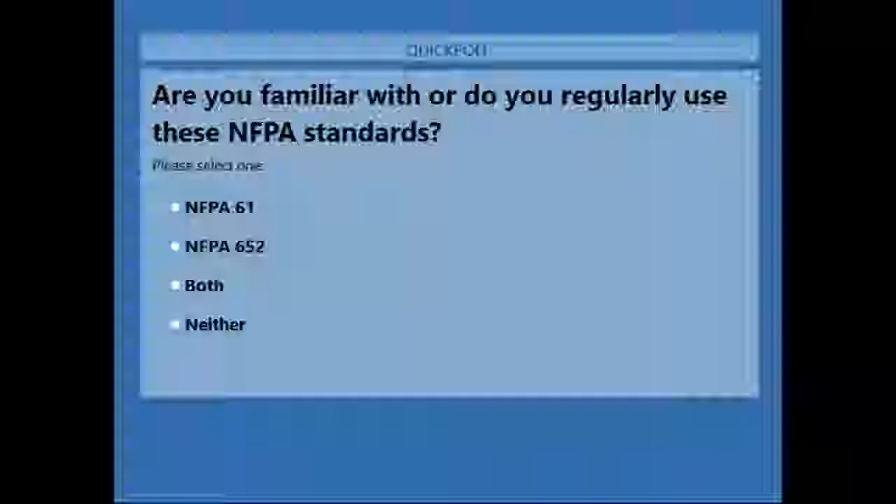Wow, okay. Both or neither is equally split. So that's a good spread. Matt, you can let me know when you'd like me to close the poll. Oh, you can close the poll. It's just like the election. Equally split, both or neither.

So any discussion on 652 really starts with the Imperial Sugar explosion in February 2008. NFPA 652 is a brand new standard. And the Imperial Sugar explosion in February 2008 was kind of a watershed event as far as changing the NFPA standards. And there would not be an NFPA 652, in my opinion, if it wasn't for this explosion. So the Imperial Sugar explosion, 14 killed, 36 injured. It was a major event. I was in Australia at the time, and I heard about it all the way in Australia because it was on the news everywhere.

So I'd like to talk about the Imperial Sugar explosion a little bit at first. So these are two pictures of the aftermath of the explosion and fire. The key takeaways were, number one, poor housekeeping, overloaded dust collectors, equipment maintenance, and poor management of change. These causes are very familiar and common for combustible dusts, so not surprising that these would be factors at all.

Some of the background on what happened: they had a conveyor system below the silos, and they had recently installed a cover on top of one of the conveyors to prevent contamination. The housekeeping was very poor. Unfortunately, once they covered the conveyor, the dust collector system was not picking up the dust. They had an ignition source, and it exploded.

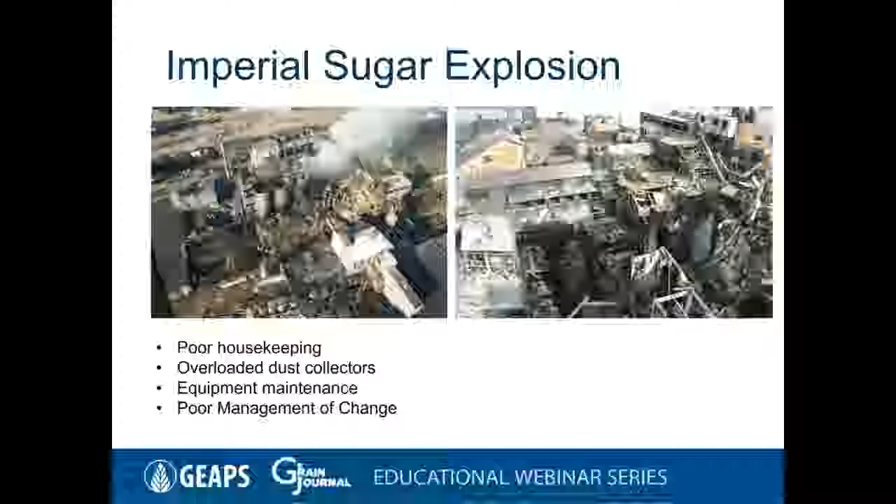So as a result of that, there was a major investigation. The Chemical Safety Board came in and did its investigation, and they had a number of recommendations that they made, both to OSHA and to NFPA, and other government agencies. During their investigation, there was some confusion over which NFPA documents to use.

Technically, sugar falls under NFPA 61, agricultural dust, but some people felt that NFPA 61 wasn't adequate to address what happened at Imperial Sugar. So they were really using some of the others, NFPA 654, which is another one of the dust documents. And there's a total of 5 dust documents, and they weren't exactly clear on which ones to use. So there was a lot of criticism of NFPA because it wasn't clear on what they should use.

There were congressional hearings, there was a call for more regulation. NFPA actually testified before Congress. And then OSHA, at the urging of the Chemical Safety Board, proposed a new combustible dust rule. So there are some existing OSHA regulations, especially for the grain industry. OSHA 1910 Subpart R covers grain handling facilities, but what was recommended was really a more comprehensive rule for the entire food and agricultural industry, and not just food and agricultural, but any industry that handles combustible dust.

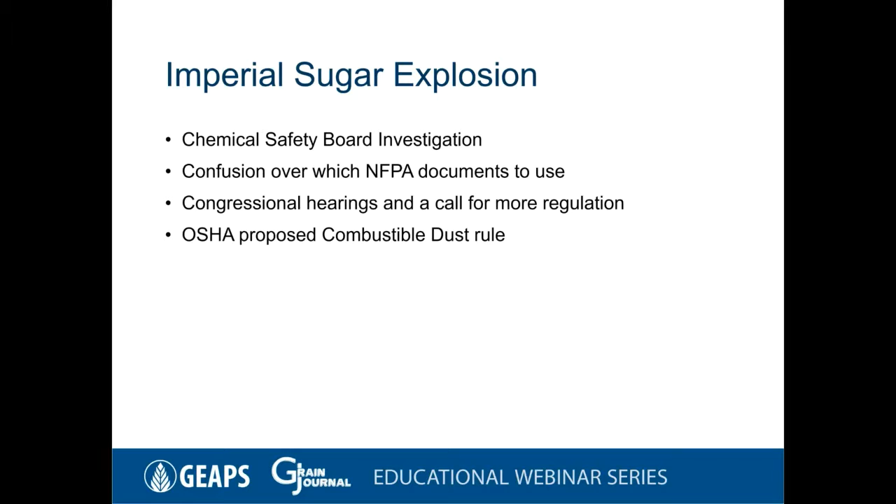So the various NFPA committees had a lot of pushback on combining it into one big standard. So finally, it was agreed to form a new standard called the Fundamentals of Combustible Dust, which was NFPA 652. And so this was developed out of a perceived need to provide basic requirements for handling combustible dust. They started work in 2012 and they finished in 2015.

As you can imagine, there was a lot of discussions, a lot of changes. The standard was delayed 6 months, I believe, because there were some things that couldn't be agreed upon. But finally, 2016 was the first edition of NFPA 652, and it set a requirement to complete a dust hazard analysis within 3 years of the effective date of the standard, and that would have been 2019.

So 652 was a very new document. Not a lot of people were aware of it. Our poll today, 38% of the people were aware of both NFPA 61 and 652, so that's a pretty good number.

But the standard is revised every 3 years, and so the 2019 edition of NFPA 652 set a date of September the 7th, 2020 to complete the dust hazard analysis. So it slipped a little bit from the original date of 2019, but instead of just saying 3 years, it had a hard date of September 7th, 2020. And then it also requires a dust hazard analysis to be reviewed and updated every 5 years.

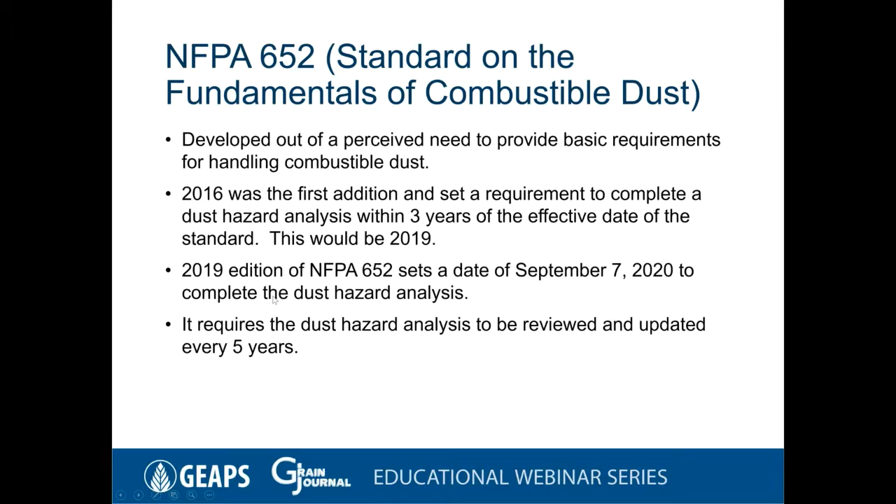So then we moved to NFPA 61, which is the standard for prevention of fires and dust explosions in agricultural and food processing facilities. This NFPA standard, the original version, was adopted in 1923 for grain terminals and flour mills. And the modern version really was adopted in 1995 when several of the agricultural dust documents, including sugar, were combined into one document for the agricultural and food processing industries.

So NFPA 61 is applicable to all facilities that receive, handle, process, dry, blend, use, mill, package, store, or ship agricultural bulk materials, their byproducts, dusts, grains, oil seeds, agricultural seeds, etc. It's sugar, flour, etc. So for GEAPS members, NFPA 61 is the standard that you would fall under.

Also applicable to all facilities designed for manufacturing and handling starch, drying, grinding, conveying, processing, etc. The only thing it really doesn't apply to is what's covered by NFPA 36, which is the oil seed extraction standard for soybean processing, really.

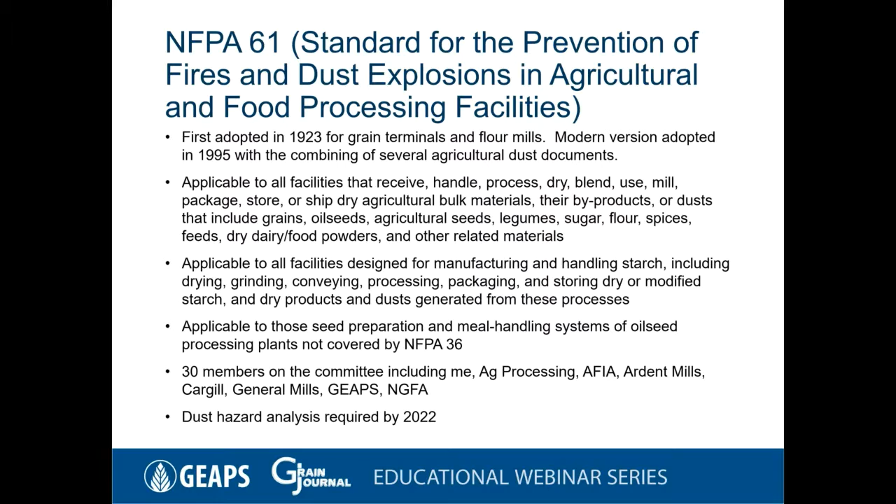So there's 30 members on the committee for NFPA 61. The agricultural industry is represented by Ag Processing, AFIA, Ardent Mills, Cargill, General Mills, GEAPS, and the National Grain and Feed Association. And NFPA 61 says that the dust hazard analysis is required by 2022. So which one do you use? 652 says by 2020, September 7th, and NFPA 61 says by 2022.

So there is a conflict section in NFPA 61, and it's in all the dust hazard standards now, and they pretty much say the same thing. It says where a requirement specified in this industry-specific standard, meaning NFPA 61, differs from a requirement specified in 652, the requirement in this standard, NFPA 61, shall be permitted to be used instead. So basically what this says is that NFPA 61 takes precedence over NFPA 652.

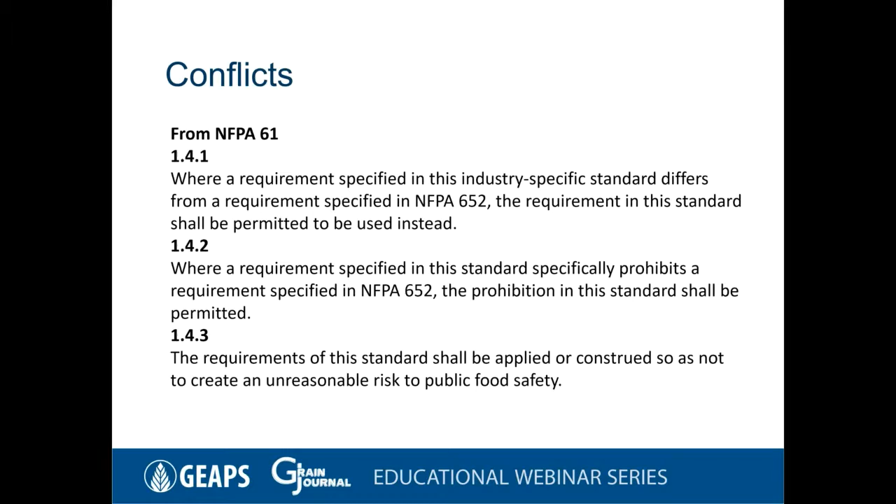Or it says where a requirement specified in the standard specifically prohibits requirements specified in 652, the prohibition in this standard shall be permitted. And then it was also added, the requirements of the standard shall be applied or construed as to not create an unreasonable risk to public food safety. So NFPA 61 is unique from the other combustible dust standards because it does involve food and food safety. So we added that one just to make it clear so that this would not conflict with NFPA 652.

And to handle any conflicts and provide a common framework for the dust documents, a correlating committee was formed in 2012, 2013. So the correlating committee on combustible dusts for NFPA oversees all of the dust documents, including NFPA 61; there's 484 for combustible metals, there's 652 Fundamentals of Combustible Dust. There's 654, which is combustible particulate solids, which originally back in the 50s when it was first started, was really for the chemical industry dealing with plastic dusts and things like that. There's 655 for sulfur fires and explosions, and then there's 664 for woodworking facilities.

There's currently 14 members on the correlating committee. And Cargill is really the only grain industry representative on the committee. Right now, each of these documents is on a 3-year cycle; some of them were originally on 5-year cycles for revision. NFPA 61 was a 5-year cycle document, but because of all the changes with 652 and the changes in 61, all the documents were moved to a 3-year cycle.

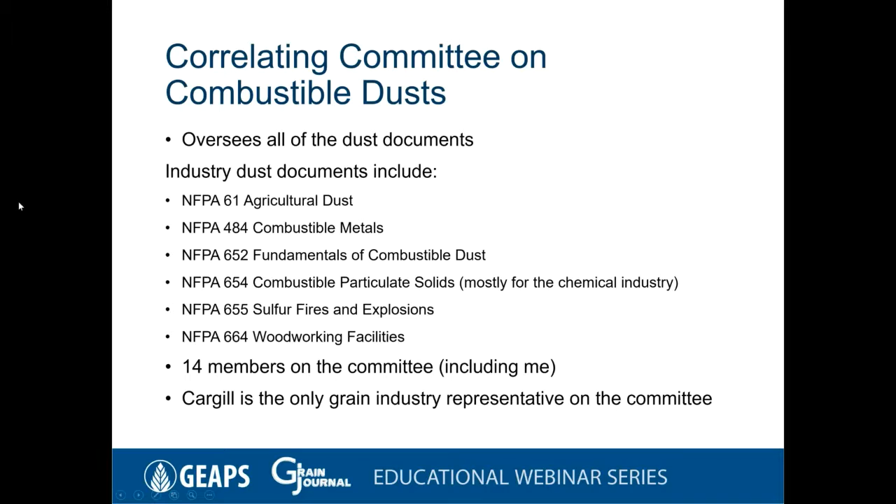So they're currently on 3 years, but now that some of the dust is settled for the changes in 652, we might be changing some of them back to 4 or 5-year cycles. That's kind of in flux right now, and it's up to the committee itself to determine how often they want to meet.

So one of the differences in the dust hazard analysis is that it is retroactive. Normally the requirements in NFPA standards are not retroactive unless it specifically says they are. And in that case, if it's not retroactive, the facility would only need to be upgraded to the current standard if there are major modifications or new processes, et cetera.

But the dust hazard analysis is retroactive, and by retroactive, they mean it's required for new construction or significant modifications that exceed 25% of the replacement cost of the equipment. So it is something that should be done, and should be done by the deadline, if you want to follow NFPA 61 or 652.

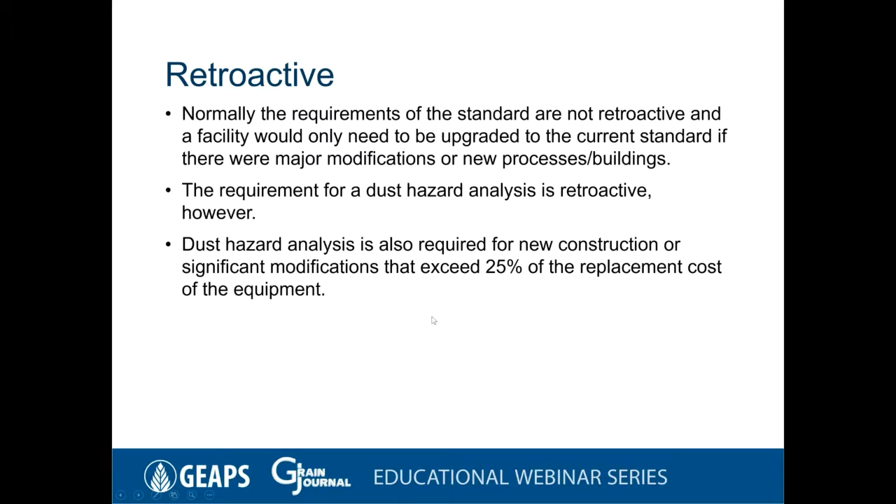So my next polling question is, what documents do you follow to perform a dust hazard analysis at your grain handling facility? And Kendall tells me there was a problem with loading the polling question into her computer system. So if you could just write down your answer, and then I'll give you the answer in 10 seconds.

So the answer to the question really is somewhat of a trick question. NFPA 61 is what I would use as an agricultural or grain handling facility. However, you could use NFPA 652, because in NFPA 61, really, if you comply with anything in NFPA 652, it's going to be acceptable in NFPA 61. So answers A, B, or C would be acceptable for this answer.

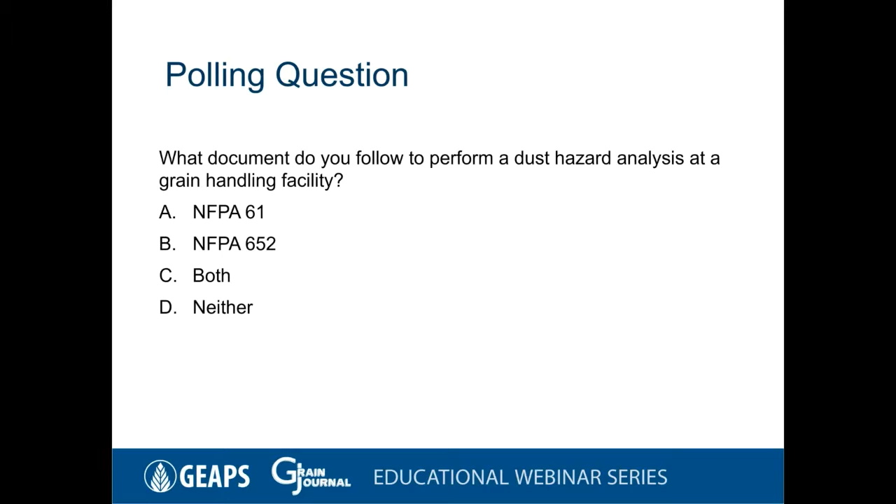So the next question: is there a need for a dust hazard analysis? One of the earliest, largest and most famous dust explosions was in Minneapolis at the Washburn A mill in 1878. At the time, it was the largest flour mill in the world, and it resulted in 18 people dying from the explosion and the ensuing fire. It could have been worse, but it happened on the night shift, so that was fortunate.

And right now it's been turned into a museum. If you ever go to Minneapolis, the Mill City Museum, it's a great museum. I went there last year, and it really shows you how a mill works, what the issues were with the dust explosion, and I'd highly recommend it if you visit Minneapolis.

So moving ahead, 100 years later, Westwego, Louisiana, 1977. That's the picture that's in this slide. Grain elevator explosion, 36 people died. It was a pretty horrific explosion, and it brought around some changes to NFPA requirements. More recently, last year, Cambria, Wisconsin, and Northrup, Minnesota. And then this year, South Sioux City, Nebraska, and Crystal City, Manitoba also had dust explosions, fires.

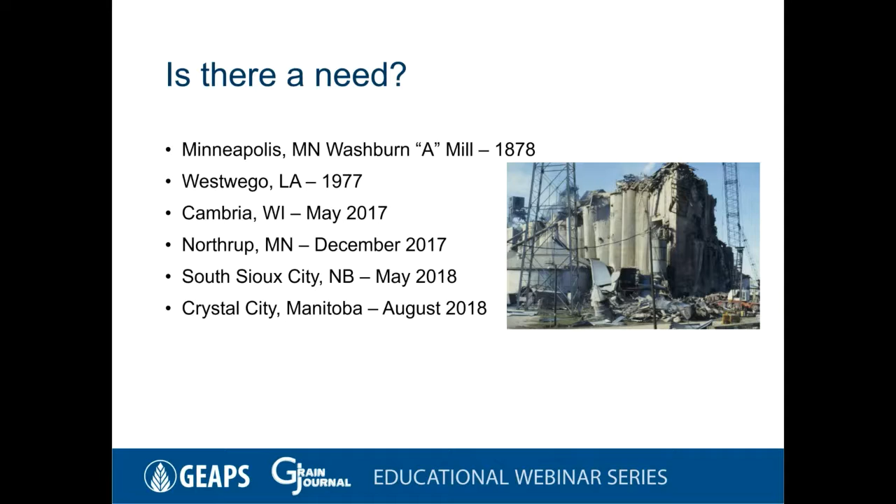So then the question is, okay, who's in charge? Is OSHA in charge of requiring you to do a dust hazard analysis? Right now they're not. If you have an event and OSHA comes in and does an investigation, you'll certainly be fined if you didn't follow NFPA standards or do a dust hazard analysis. But obviously, if there is an event, something went wrong and you're likely to be fined anyway. So is the local fire marshal or building code official in charge? Well, it could be, depending on the laws of your jurisdiction.

NFPA, are they in charge? NFPA is not in charge of anything. They have no authority whatsoever. They're a nonprofit organization that writes the codes, or it depends on the committee to write the codes. So going back to the local fire marshal or building code official, local fire codes and building codes can adopt NFPA standards. So if your local jurisdiction has adopted an NFPA standard like NFPA 61 or NFPA 652, then it could be required by law to complete a dust hazard analysis.

But as far as I know, nobody has adopted NFPA 652 yet. It's too new, and building codes don't change very quickly, and lots of times they're also subject to politics. So I would check your local jurisdiction to determine if it's required by law to do a dust hazard analysis and follow NFPA 61 or NFPA 652.

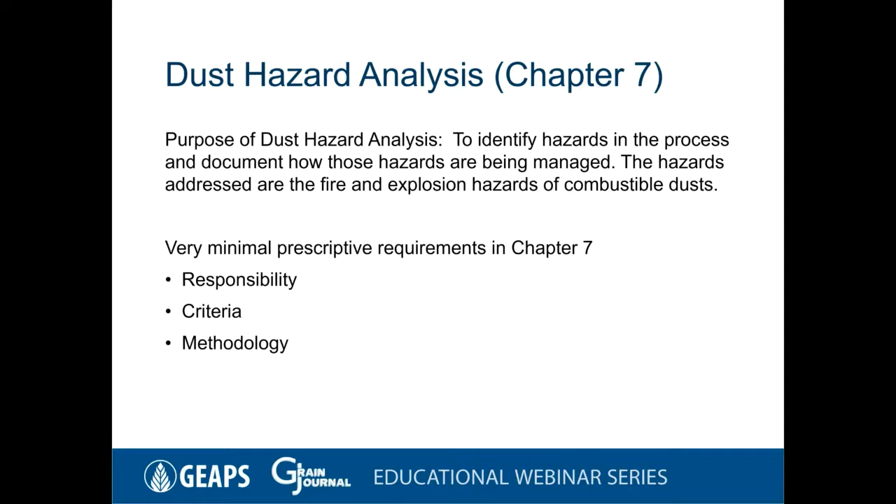So the responsibility and criteria: for right now, the owner-operator is the responsible person to ensure the dust hazard analysis is completed. So as I said earlier, it's not a government requirement unless your local jurisdiction has adopted these standards. So for right now, it's voluntary, and the owner-operator is responsible for it. The dust hazard analysis shall evaluate the fire, the deflagration, and explosion hazards and provide recommendations to manage these hazards. The dust hazard analysis shall also be performed or led by a qualified person. And I have a slide on what a qualified person would be.

And the results of the DHA review shall be documented, including any necessary action items requiring change to the process materials, the physical process, the operations, or the facilities associated with the process. So it has a pretty broad range. And for major large plants, it can be quite complicated, but for smaller country grain elevators, it shouldn't be a difficult process.

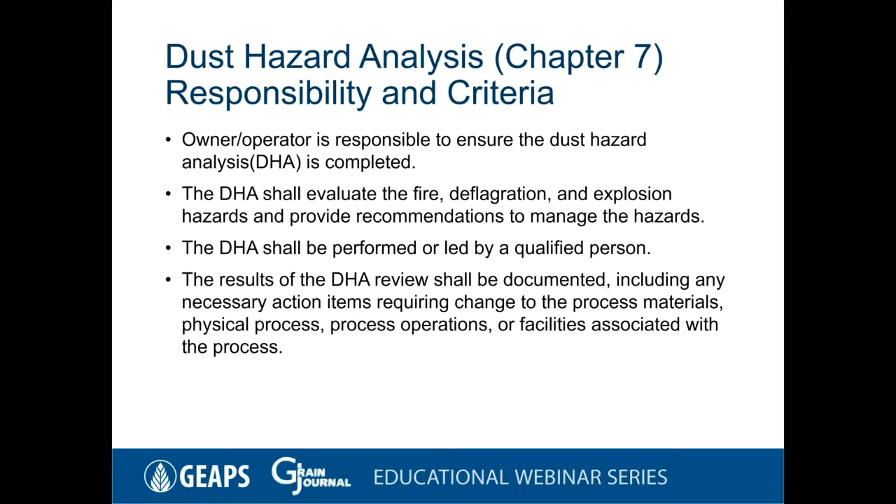So the next slide. So who is a qualified person? The qualified person who's leading or performing the DHA should be familiar with conducting a DHA and the hazards of combustible dusts. So yes, it's always helpful if the person is familiar with the hazard. Usually you'll have a team perform a DHA. The team could be made up of a variety of persons: operations, maintenance people, process engineering, safety professionals, consultants. They should be familiar with the process, and hopefully people at the actual facility or plant would also participate in the dust hazard analysis because they know their plants better than anyone else. So that would be considered a qualified person.

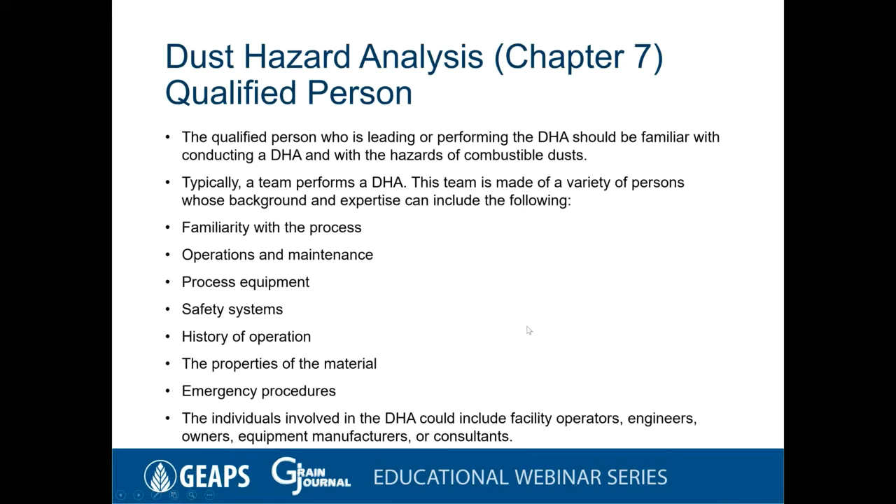The methodology that you would use, this is in Chapter 7. So these are the basic requirements that the process has to meet to be considered an adequate dust hazard analysis. So identification and evaluation of the process or facility areas where fire, flash fire, and explosion hazards exist. And then where they do exist, identification and evaluation of the specific fire and deflagration scenarios shall include the following. 1, identification of the safe operating ranges, meaning basically the ranges of the equipment, what's the explosive range of the combustible dust. Identifying the safeguards that are in place to manage the fire, deflagration, and explosion events. And then also recommendations for additional safeguards where warranted, including a plan for implementation.

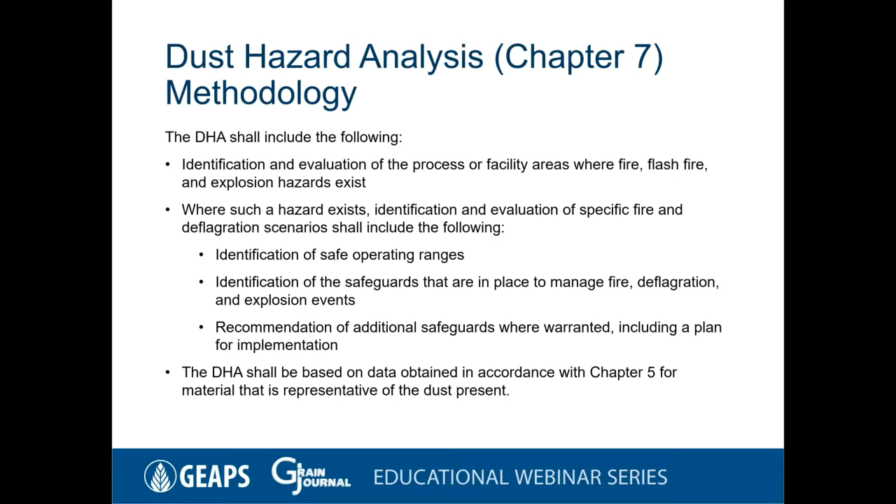And the DHA shall be based on data obtained in accordance with Chapter 5 for material that is representative of the dust present. So lots of times dust will be mixtures of various things. You have various size flakes in the dust, you have different types of dust, you have contamination in the dust. Sometimes you even have metals in the dust. So it should be representative of the actual dust that you have at your site.

So how do you know if you have a combustible dust? So we go to Chapter 5. Chapter 5 says that the owner-operator shall be permitted to either assume the dust is combustible, or you can determine the combustibility if you don't think the dust is combustible.

So in order to determine the combustibility, you can use historical or published data that is representative of the current conditions. There's a large annex material in NFPA 61 that provides information on various types of agricultural and food dusts that provides very good data, but always remember it is a range of data, and conditions can be different depending on how you're processing and making the dust. Moisture content has a huge impact on whether the dust is explosive or not.

So you can analyze a representative sample rather than using the published data, or the samples can be tested using the ASTM E1226 standard test method for explosivity of dust clouds, or they could also be tested using the ASTM E1515 standard test method for minimum explosible concentration of combustible dust. Those are long titles for very, very complicated testing. And there are testing labs that you can send a sample to, and they can perform those tests for you, and you get back results.

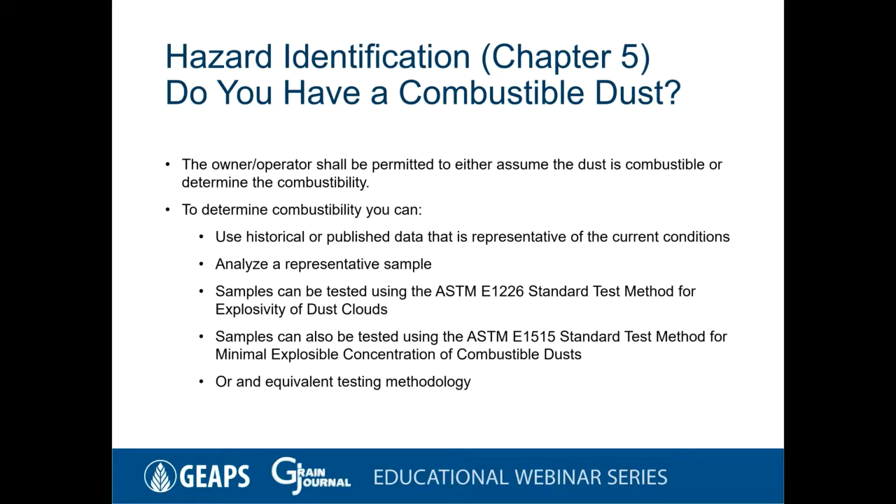So once you know that you have a combustible dust, then you have to determine, okay, will the combustible dust explode? So how do you know it's going to explode? A deflagration is a propagation of a combustion zone at a velocity that is less than the speed of sound in the unreacted medium. So most agricultural dust explosions are going to be deflagrations, as opposed to a detonation, which is velocity faster than the speed of sound. And these are usually gas explosions, flammable liquids that form into a gas, things like that can be detonated.

So the dust hazard analysis should consider 4 conditions that are required for deflagration. A combustible particulate solid of sufficiently small particle size to deflagrate. So the key words here are sufficiently small particle size. In some of your processes, you might have large flakes. Flakes are not going to explode per se, but flakes could give off some fine-grained particles, some dust that could have a sufficiently small particle size to explode.

2, combustible particulate solid suspended in air, or other oxidizing medium, to deflagrate. So again, the key word here is suspended in air. So number 1 was a small particle size. Number 2, suspended in air. Number 3, a combustible particulate solid suspension of sufficiently high concentration to deflagrate. So here the key words are sufficiently high concentration

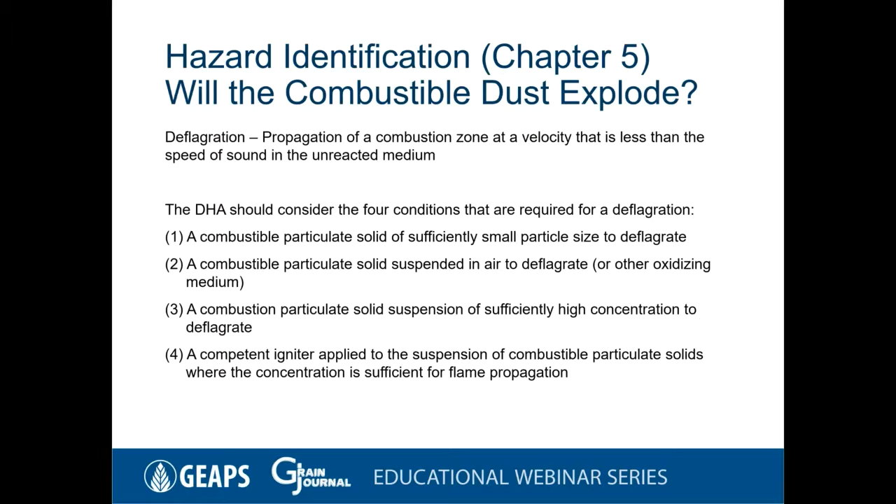of dust. So we have small particle size, we have suspended in air, it's sufficiently high concentration, meaning it's in the explosive zone. And then lastly, we need some method of igniting the dust cloud to have an explosion or deflagration. So these are the 4 things that are required in order to have a dust explosion.

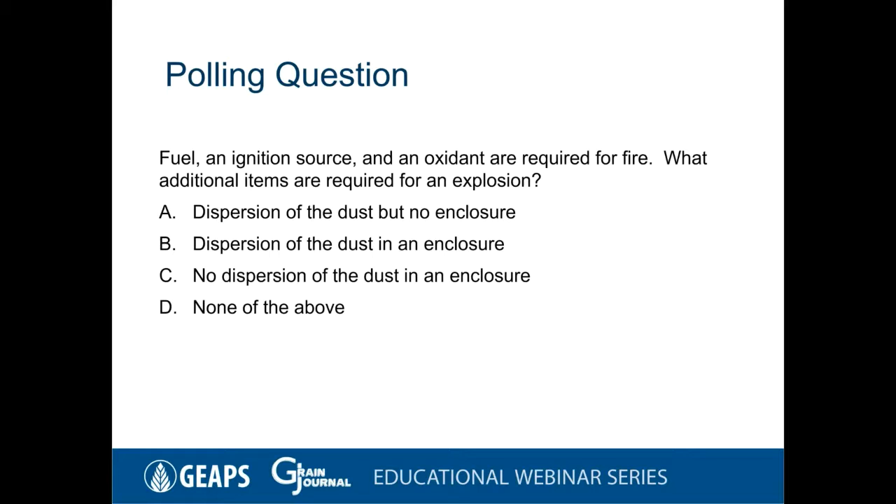And the answer, of course, is B, dispersion of the dust in an enclosure, as was shown in the triangle and the diagram.

So once we've determined that you do have an explosible dust and you do have conditions that could cause an explosion, what methods do we want to use to perform a dust hazard analysis? So we perform a dust hazard analysis to evaluate the hazards and provide recommendations to manage these hazards. And there's several possible methods to do this.

One is a checklist, which NFPA 61 has an example checklist in the annex material. You could do a what-if analysis, failure mode and effects analysis, fault tree analysis, HAZOP study. So there's many ways to do a dust hazard analysis, and there's no one specific requirement on how to do it. It just has to include those items that I listed on the earlier slides. And additional guidance on performing a DHA is available in NFPA Guide to Combustible Dust and in the AIChE Guidelines for Hazard Evaluation Procedures.

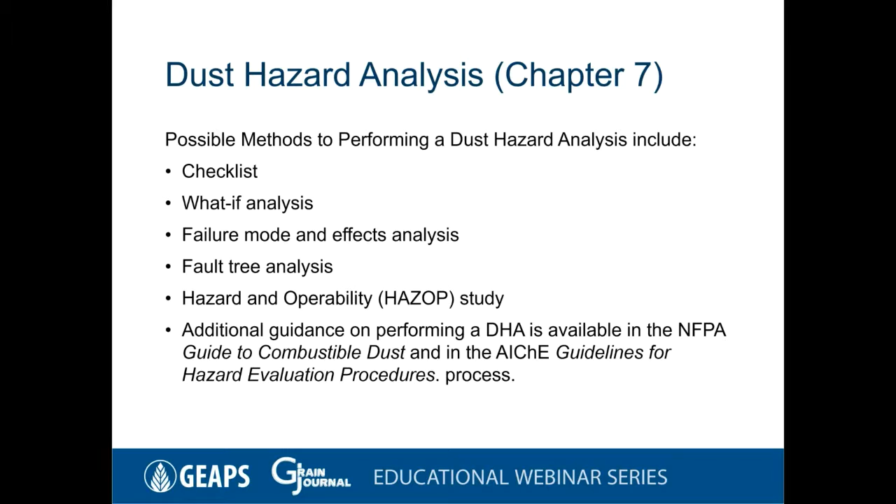So the rest of the presentation is briefly discussing the different topics covered by the checklist in the annex material of NFPA 61. So there's 14 topics that are covered, and the first one is employee training. So employees should be made aware of combustible dust hazards for sure. So that's one of the first questions in the checklist. Are the employees made aware of combustible dust hazards? Are they trained properly to include housekeeping and cleaning equipment, maintenance, safety critical devices, hot work?

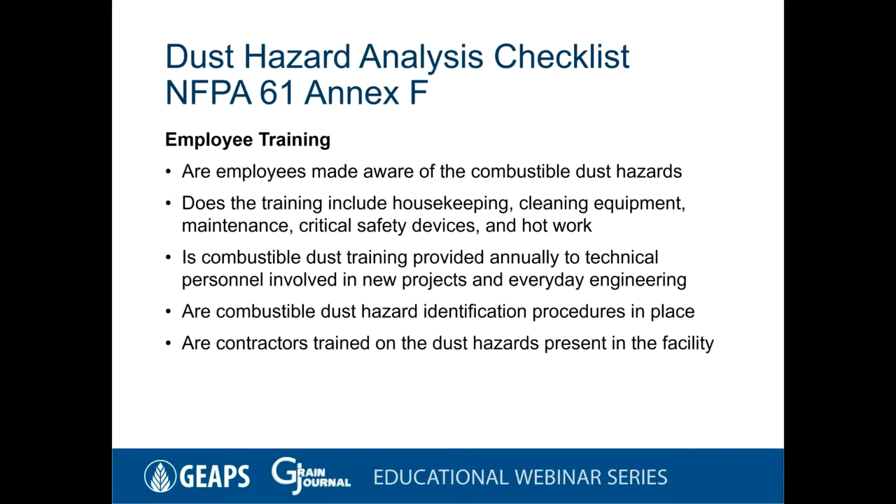Are combustible dust hazard identification procedures in place? Do you have those so that the employees can easily identify dust hazards around the plant? And then also very key, are the contractors trained in the dust hazards present in the facility? Many times fires and explosions are caused by contractors. The people at the plant do a very good job, have a very good safety program, but then contractors will come in and either they don't follow the rules or they don't know the rules, and they're just not adequately trained on the dust hazards.

So the second topic is housekeeping. Of course, housekeeping is extremely critical in reducing dust explosions, and especially the secondary dust explosions from propagating across the plant. So you should have written housekeeping and inspection procedures to make sure housekeeping is maintained. Does the housekeeping program address the high priority areas, such as floors within 35 feet of bucket elevators? Those are good areas to have spills. Areas around grinding equipment, dryers, any equipment that is going to produce heat or sparks.

Dust accumulations in the building should be maintained below acceptable limits. An example, an eighth of an inch is often cited as an acceptable limit. So again, dust accumulations on buildings and ledges and beams. If you do have an initial explosion, dust accumulation on the building is just going to propagate it into a secondary explosion. So very important for housekeeping in those other areas.

Also, when you are cleaning, using compressed air to blow down areas is not permitted until all the ignition sources have been de-energized, because you don't want to cause a dust explosion by trying to clean up the dust to prevent a dust explosion. And then also storage of combustible and flammable liquids and gases should be separated from any processes that are handling combustible dust.

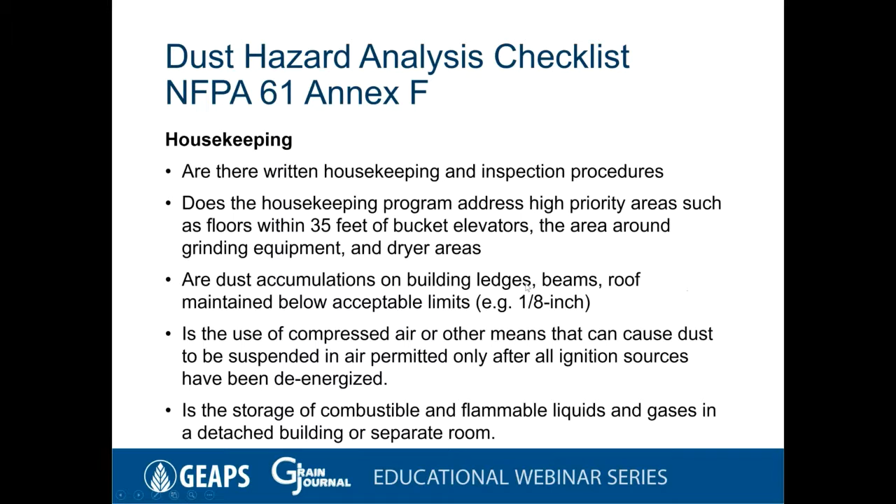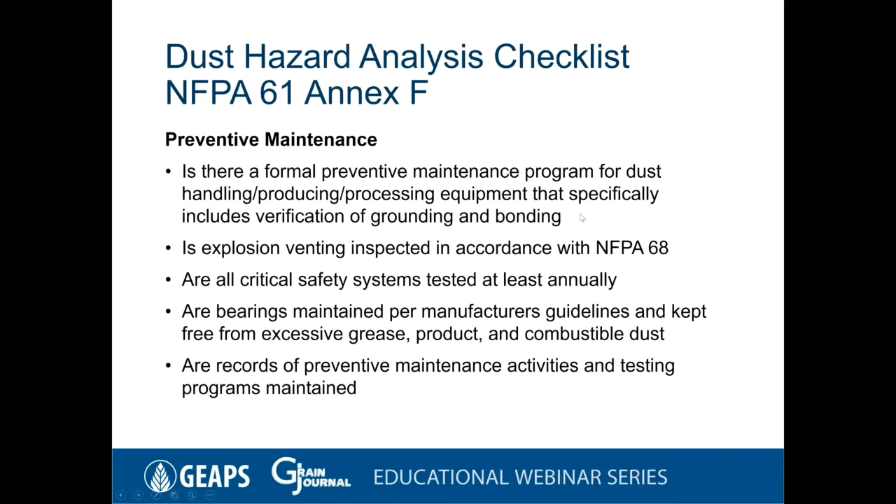The next section is preventive maintenance. You should have a formal preventive maintenance program for dust handling, producing and processing equipment that specifically includes verification of grounding and bonding. If you have explosion venting, it should be inspected and maintained in accordance with NFPA 68, which is the explosion venting standard. Critical safety systems should be tested annually. Bearings should be maintained. Bearings are a very good source of heat and a very good ignition source for dust fires and dust explosions. And then, of course, records should be kept of the preventive maintenance so that you can show and track the type of maintenance for each equipment.

So the next section is dry solid product movement and storage, kind of a strange title, but that's what it is. So do receiving systems have a means to remove tramp metal before the elevator leg or processing equipment? So processing equipment such as hammer mills, if there's tramp metal in the grain stream and you get to a hammer mill and the hammer mill causes a spark with the tramp metal, that of course can cause a fire or explosion. Also, trucks and rail cars that are delivering grain products should be grounded and bonded, especially with the flexible connections.

Is the process dust tight? Where explosion venting is used, is there a record of the vent design basis and the flame ball trajectory verified as safe? So when you do have explosion venting, you want to make sure that the area in front of the explosion vent is free from catwalks or walkways, or areas where people would normally be located. It should be pointed in a direction that's, for 99% of the time, nobody's going to be there, and it's a safe area. And the distance too. A flame ball can shoot for a very long distance, 35, 50 feet, for a major explosion.

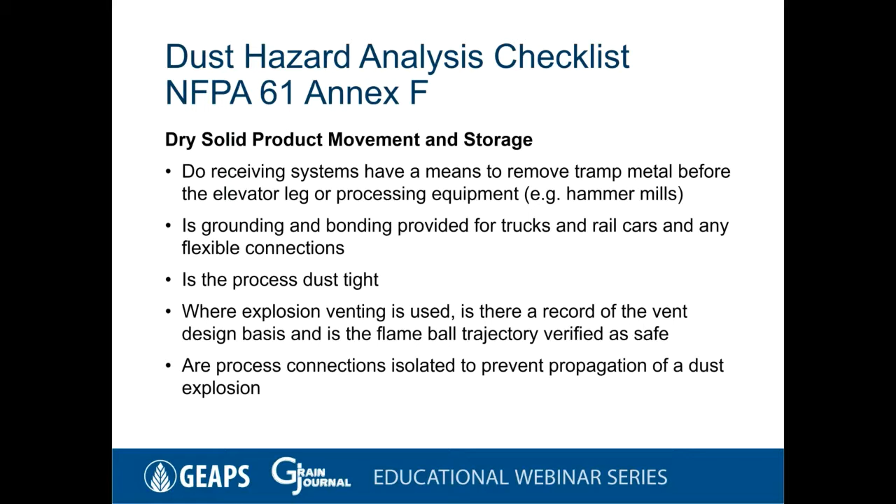Are process connections isolated to prevent propagation of the dust explosion? So when you have dust collectors, or you have grinding equipment, or conveyor systems, bucket elevators, do you have any isolation to prevent a fire or explosion starting in one piece of equipment from propagating to additional pieces of equipment?

So the next section is on receiving and storage. Are elevator legs, the leg casing, head and boot systems dust tight? You don't want a lot of fugitive dust floating around. Bearings should be mounted externally. Internal bearings are very much a source of heat that could cause explosion, and they're also very hard to clean and maintain when they're internal. So bearings should be mounted externally on bucket elevators.

Are head and boot sections provided with inspection openings to allow for clean out and to inspect the belt tracking, the lagging and discharge? Again, housekeeping, you need to have areas where you can look inside and make sure that everything is clean, and inspected on a regular basis, that the belt is in good condition. The elevator legs should be protected with explosion venting. This has been a requirement in NFPA 61 for a very long time.

And also a requirement in 61 now is that elevator legs should be outside. Certainly if they're inside, they should have explosion venting, or there's also flameless venting, which is a relatively new invention in the last 10, 15 years, and it's gained pretty widespread acceptance now. So I would encourage you to look at flameless venting also. And then also, do all elevators have hazard monitoring, such as bearing temperature, slip switches, belt alignments, things like that?

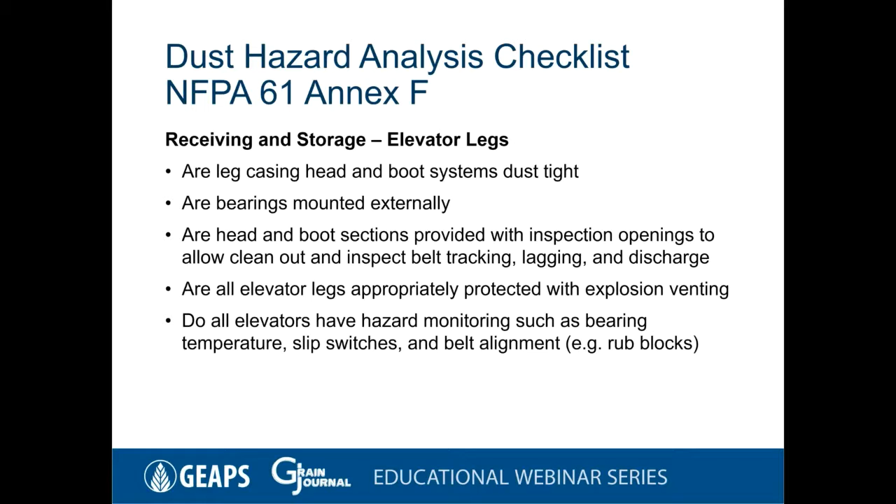So that was for bucket elevators, but we also have regular conveyor systems, and for some facilities, receiving and storage. So for a regular conveyor belt, rubber belt, the belt should be static conductive, oil resistant, and fire retardant is preferable. Bearing temperature should be provided, and the conveyor belt should be interlocked to shut down. Sometimes we miss this. Lots of times bucket elevators will have the bearing temperature provided, but ordinary belt conveyors also should have bearing temperature, because it's a good source of ignition. And for the Imperial Sugar explosion, it was likely that a hot bearing is what caused the explosion. So bearing temperature is very important for ordinary conveyor systems.

So do you have emergency stop buttons? Are they tested regularly? Do you have flippers, plows, and wipers installed, and are they functioning properly? You should also have an inspection program for conveyor covers to reduce fugitive dust. Sometimes people take off a cover to make an inspection, or there's a blockage and they'll take a cover off and then they won't put a cover back on. So you should have an inspection program to make sure that the covers are maintained if they're supposed to be there.

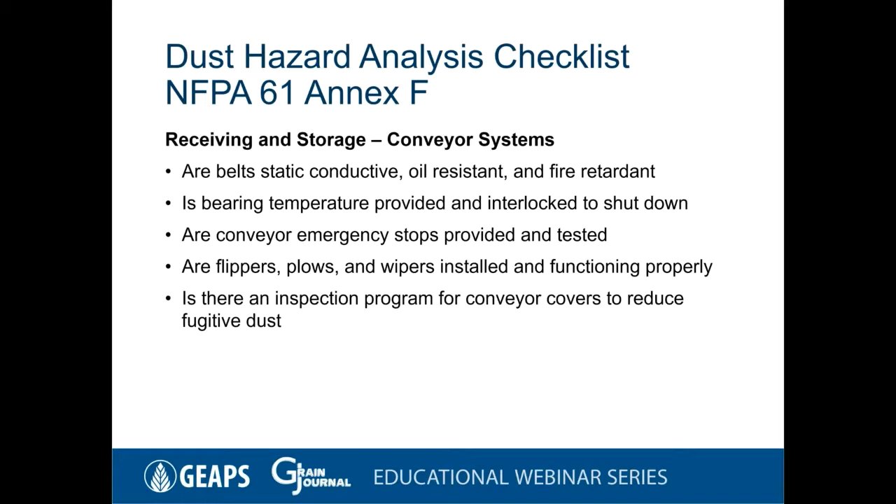So the next section would be electrical. Electrical can be a source of ignition for a dust explosion or fire. So you should have an electrical survey to identify areas that may need Class 2 Division 1 or Class 2 Division 2 electrics. So Class 2 is for dust. Division 1 is for areas where dust is in suspension in an explosive concentration for most of the time. Division 2 locations would be areas where there's a process upset or something else happened to cause a combustible dust cloud, but it's not an ordinary normal circumstance in the plant.

So Class 2 again is dust. Division 1 is for potential for dust explosion all the time. Division 2 is for potential for dust explosion occasionally, or if there's a process upset. So does the electrical equipment and wiring in an area meet the requirements of the hazard classification? This should also be checked. Do you have a management of change procedure to maintain the electrical classification?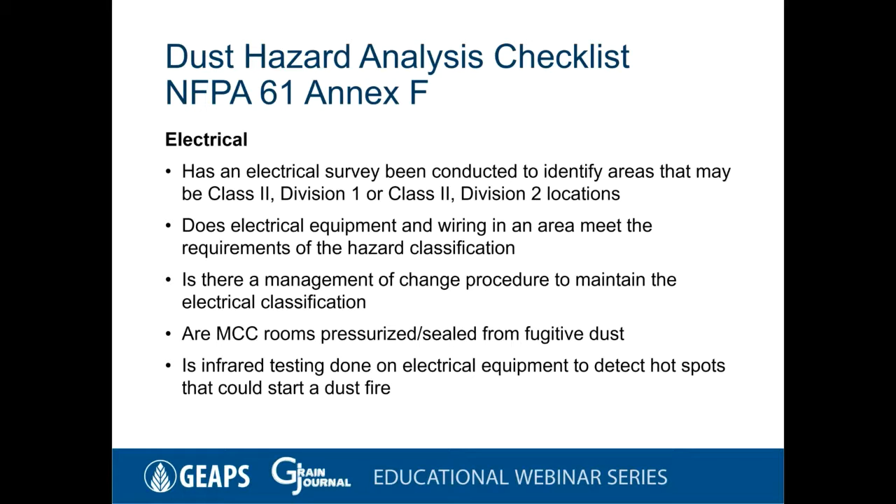MCC rooms should be pressurized or sealed from fugitive dust. MCC rooms have a lot of electrical equipment and a source of ignition for a dust cloud. And then also, as part of the preventive maintenance program, infrared testing is a good idea to be done on electrical equipment to detect hot spots that could start a dust fire.

The next topic in the checklist is dust filter systems. So dust collectors should preferably be located outside. Certainly large dust collectors should be located outside. I know that, for a lot of industries, there's small dust collectors located next to pieces of equipment. I'm talking very small dust collectors. But if you do have an inside dust collector, it should be protected by an explosion suppression system, or flameless venting is also a good option.

And then you should also have pressure gauges and alarms for the dust collection system to indicate any blockage. Dust should not normally be returned directly to the elevator leg. It should be run through a dust collector. Are the ducts isolated to prevent propagation of a dust explosion?

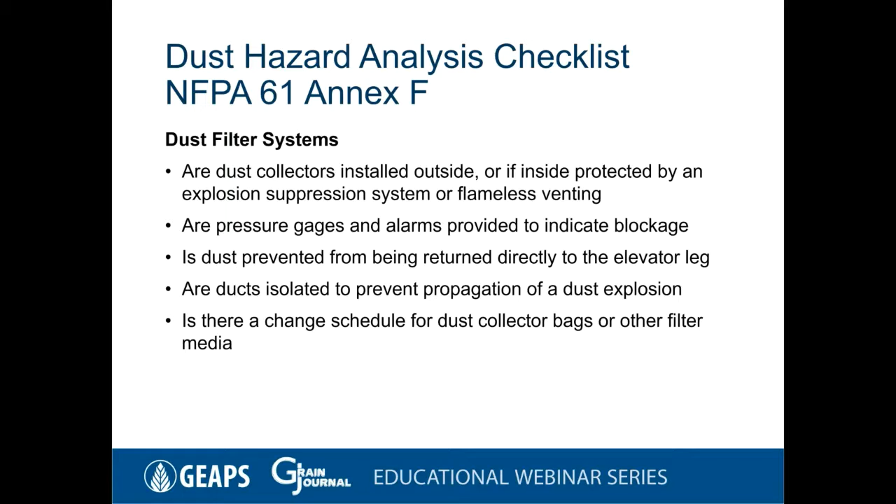So again, depending on how other things are protected, you might want to isolate dust collectors or grinding equipment or other types of equipment where you could have an explosion that would propagate to other pieces of equipment. And then also, is there a change schedule for the dust collector bags or whatever other filter media that you're using?

So the next topic is on grain processing. So do you have hammer mills or other processing equipment that could produce a spark? Having a spark detection system is a good idea. It's not required, but it certainly helps to shut down the equipment if you do detect a spark. Are magnets or other means provided to remove tramp metal upstream of hammer mills or other grinding equipment? The equipment should be grounded and bonded.

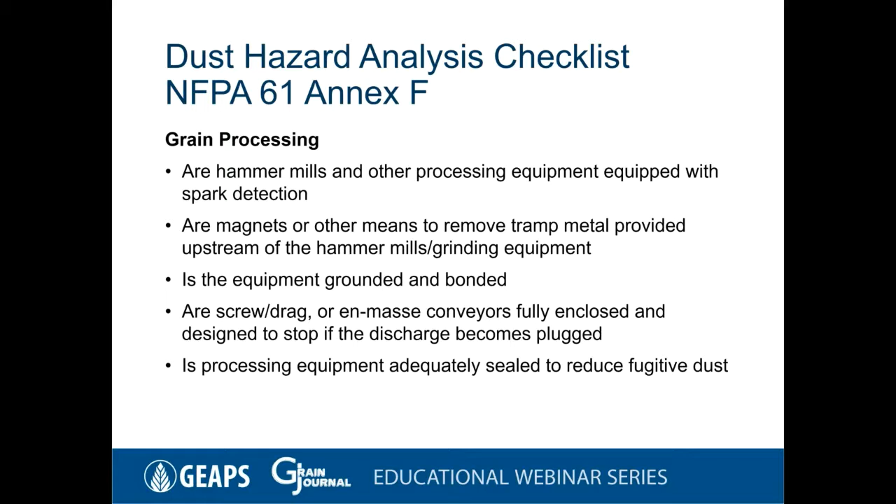For screw and drag conveyors, they normally should be fully enclosed and designed to stop if the discharge becomes plugged. And then also, is processing equipment adequately sealed to reduce fugitive dust?

Grain dryers, you know, some people may have these, others don't. So if you don't have a grain dryer, obviously you can skip this section of the checklist. But for people who have grain dryers, they should have high temperature interlocks to shut down the burners and the fans and the product flowing into the dryer and out of the dryer. You should have level alarms, shutdown interlocks, fire suppression system.

A sprinkler system is preferable in a dryer. There's been many dryer fires that usually don't result in an explosion, which is good, because, you know, everything is wet in a dryer. But they are pretty prevalent as far as having fires inside the dryer.

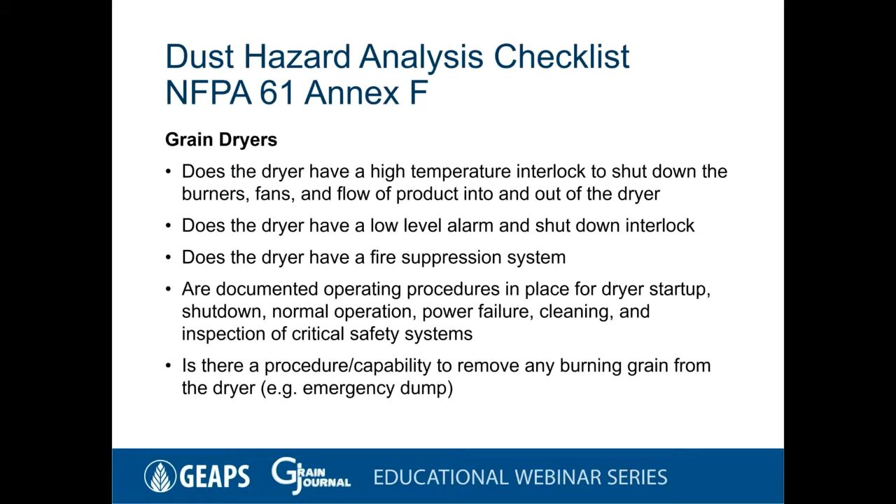You should have documented operating procedures for startup, shutdown, normal operation, power failure, cleaning, inspection of the critical safety systems. You should have a procedure or capability to remove any burning grain from the dryer, like, for example, an emergency dump, because once you have the fire inside the dryer, it's preferable to remove the grain from the dryer, so you can extinguish the grain once it's outside.

Hazard monitoring and alarms. You should have critical hazard monitoring devices tied into an audible system for the plant control room, or like a startup alarm, things like that. That's a plant-wide alarm. The alarm systems also should be tested regularly and records should be kept. Do you have a history of any problems with the hazard monitoring devices? It's always good to document that and correct the problem.

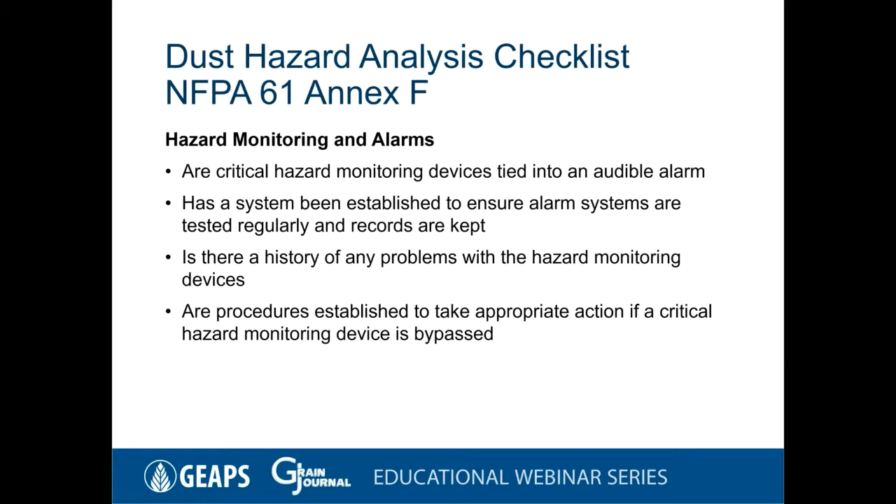And are procedures established to take appropriate action if you do have a critical hazard monitoring device that's bypassed? Sometimes you need to do that. Sometimes for maintenance purposes or whatever, you need to bypass a critical piece of hazard monitoring equipment, but you should have a procedure in place to put that back in service as quickly as possible and to notify the appropriate people that you are bypassing a critical hazard monitoring device.

Emergency response is, of course, important, especially for grain combustible dust fires and explosion hazards. A lot of local fire departments may not be familiar with the hazard, and I've heard stories of lots of volunteer firemen and even full-time firemen getting injured from doing the wrong thing when they're fighting a fire involving a silo that has combustible dusts.

So does your emergency response plan have specific procedures for grain bin and silo fires? And is the local fire department aware of firefighting procedures for grain fires and potential dust explosions?

You're relying on them to fight that fire and put it out, and it's a good idea to invite the fire department on a regular basis so they are familiar with the hazards. And talk to them, ask them, what would you do? How would you fight this fire? Some of them might say they're not going to fight the fire. So you want to establish a perimeter of how far away you should be in case you do have a dust explosion in a silo.

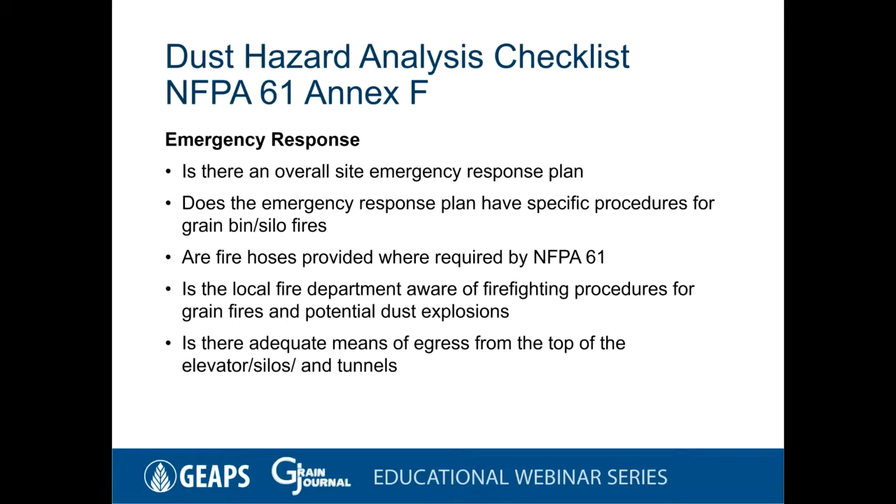And then also hoses are required by NFPA 61 for grain silos. And also, is there adequate means of egress from the top of the elevator or silos and tunnels? Very important for employees, and then also very important to allow the fire department to get in to fight the fire.

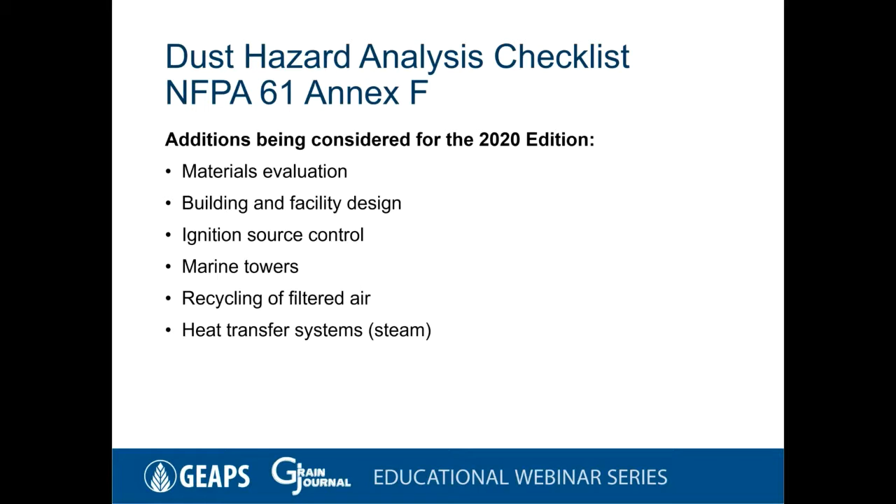So I didn't include this in the presentation because it hasn't been adopted yet. It's been proposed. And so like I said, when we have our meeting in January, it'll probably be adopted. So you'll have additional information in the 2020 edition of NFPA 61 in the annex to help you do a dust hazard analysis for your facility.

So those are the basics of the dust hazard analysis. And so the results of the dust hazard analysis, of course, should be documented. And the documentation should include any action items requiring change to the process materials. Also any action items requiring a change to the physical process. And are there any action items requiring change to the operations or facilities associated with the process? So all of this should be documented as a result of the dust hazard analysis.

And as part of the documentation, NFPA 61 says you should also include, but not be limited to, test reports, drawings, sizing calculations for explosion venting. It's important to document things not only so that future process engineers have an idea of what you did in the past and can work on that for whatever modifications they have, but also any government agencies or insurance companies might want to review the dust hazard analysis.

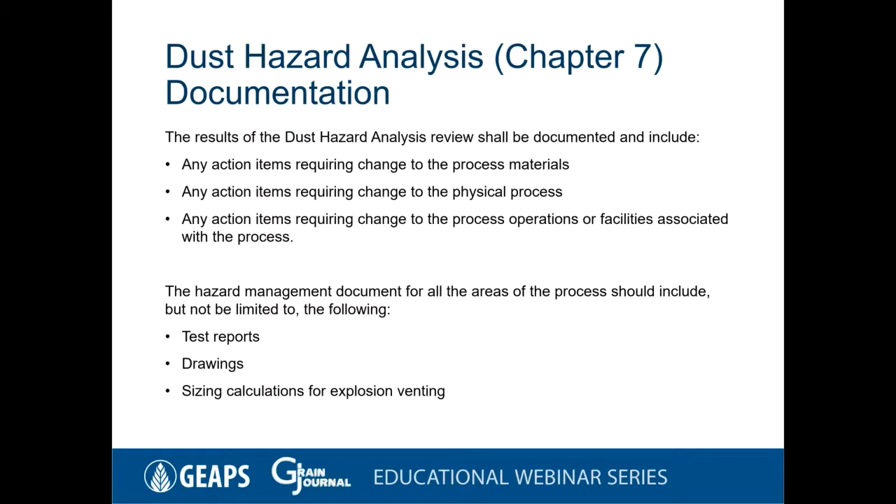And so it's good to have good documentation of everything that you did. You don't want to spend a lot of time doing a lot of hard work and then not write it down and keep it in a safe place. So that's my presentation, and I guess we'll open it up to questions.